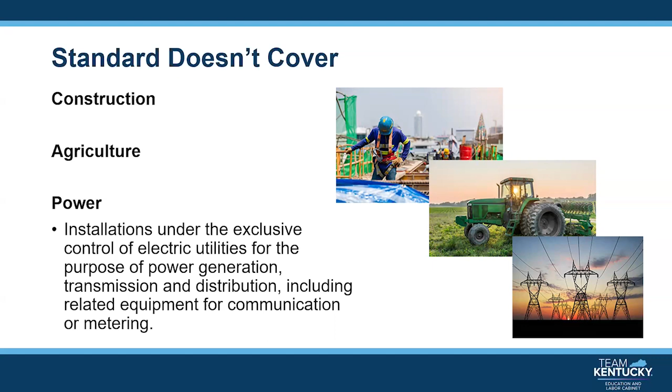It doesn't cover any work where the employee is exposed to just electrical hazards. Those activities would be covered under Subpart S of 1910, specifically Section 333. It also doesn't cover anything in oil and gas well drilling and servicing.

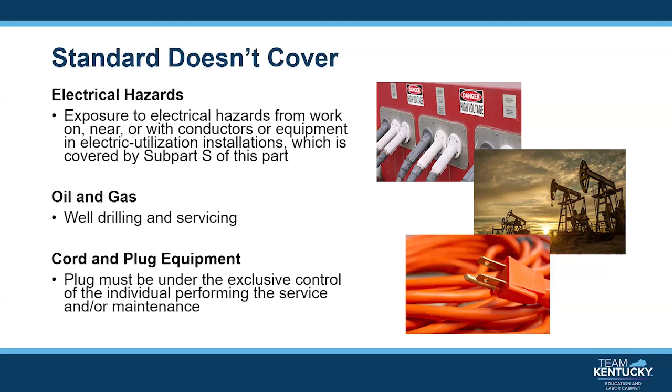And finally, it doesn't cover any cord or plug powered equipment, provided that unplugging the equipment completely de-energizes and isolates any hazardous energy pertaining to the equipment, and the plug remains under the exclusive control of the employee performing the servicing and or maintenance, meaning the employee has the authority to and is continuously in a position to prevent or exclude other individuals from re-energizing the machine or equipment during his servicing and or maintenance activity.

Lockout tagout is needed when employees are performing servicing or maintenance activities on machines and or equipment. OSHA defines servicing and or maintenance as workplace activities such as constructing, installing, setting up, adjusting, inspecting, modifying, and maintaining and or servicing machines or equipment.

These activities include lubrication, cleaning, or unjamming of machines or equipment, and making adjustments or tool changes where the employee or employees may be exposed to the unexpected energization or startup of the equipment, or release of hazardous energy.

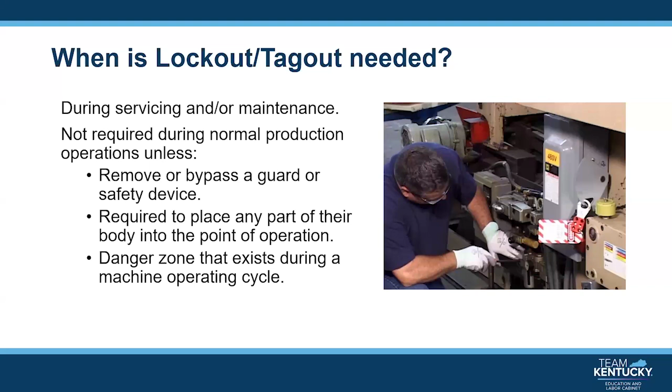Lockout tagout is typically not required during normal production operations unless an employee or employees is required to remove or bypass a guard or safety device, or required to place any part of their body into the point of operation, or enter a danger zone that exists during the machine operating cycle.

These are some examples of hazardous energies that employees could be exposed to. Over the next couple of slides, we'll show you some examples of those hazardous energies, as well as some of the sources they can come from.

So the first one is electrical. This can be powered via an electrical panel or a disconnect, which we'll talk about.

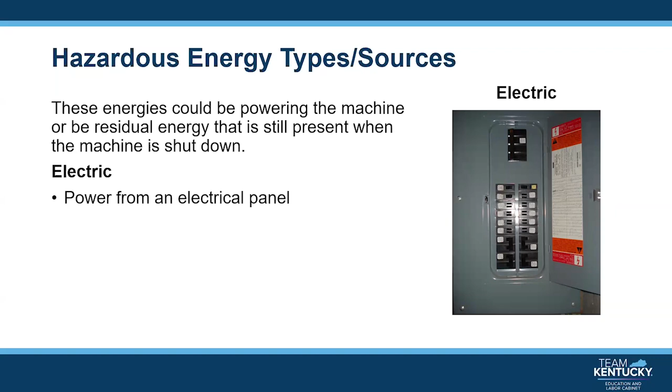You've got hydraulic hazardous energy, such as pressurized hydraulic fluid on a machine. You've got pneumatic or air, which could be from a pressurized airline on a machine.

You've got gravity. This is commonly associated with power presses or where you've got suspended parts on a machine that can come down and potentially crush the employee performing the service or maintenance activity.

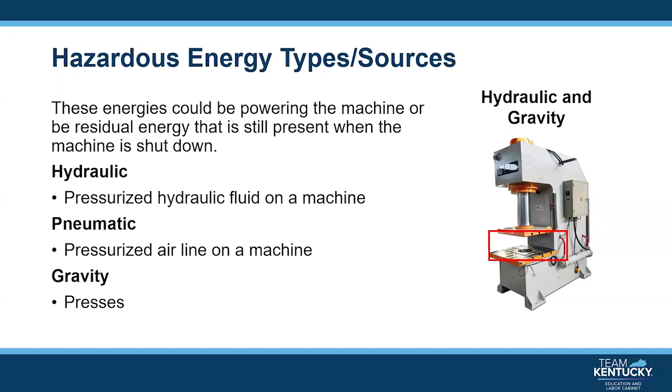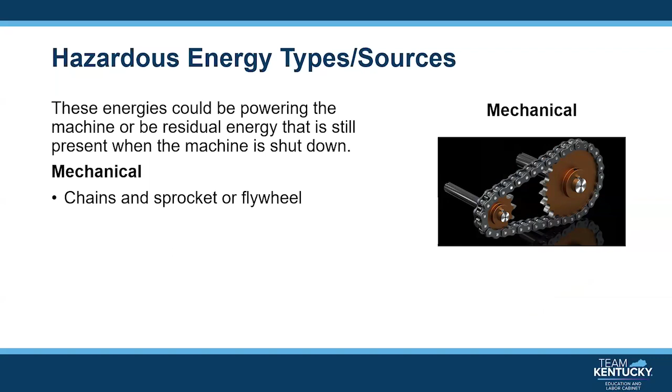You've got mechanical. This could be chains and sprockets, or flywheels, belts and pulleys on a machine.

You've got chemical hazardous energy. This could be from chemical vats or pipes with corrosives.

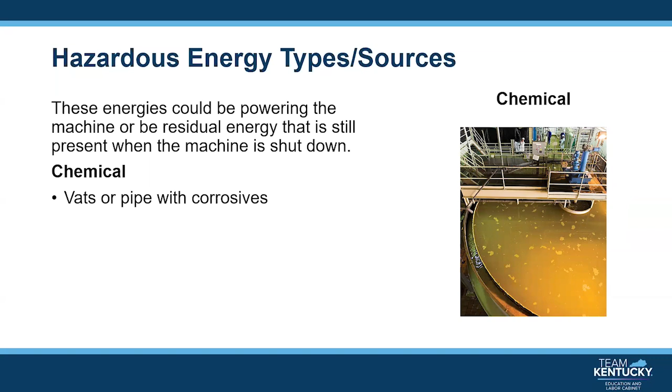You've got thermal hazardous energy. This is commonly associated with facilities that have ovens.

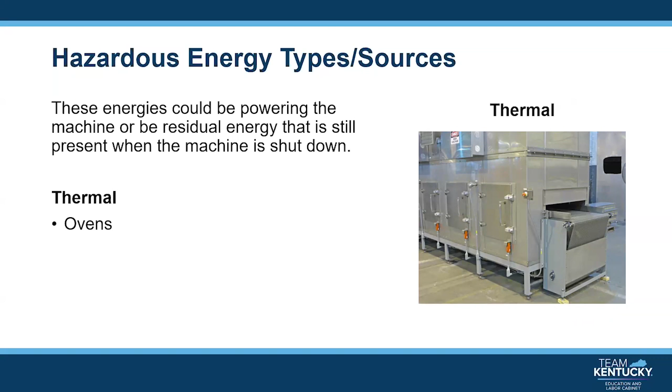Control circuit devices such as interlocks used in machine guarding are not considered energy isolating devices, as they do not isolate power.

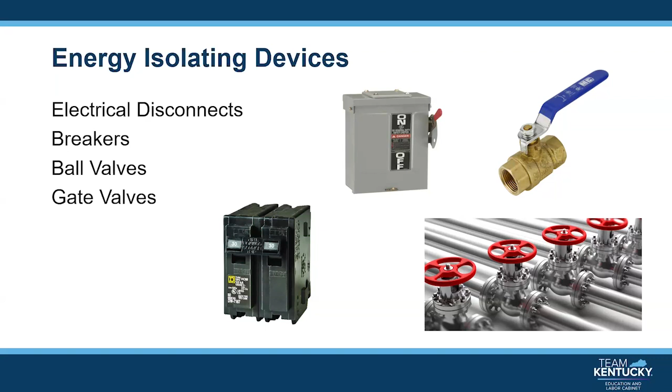Commonly referred to as being one and the same, lockout tagout is actually two different practices of isolating hazardous energy. Lockout is the practice of applying a lock to an energy isolating device. Tagout is applying an awareness device, such as a tag, to an energy isolating device.

1910.147 states that if an energy isolating device is capable of being locked out, the employer shall utilize lockout unless the employer can demonstrate that utilization of a tagout system will provide the same amount of protection. Additional means to be considered as part of demonstrating full employee protection regarding tagout include implementation of additional safety measures, such as removal of an isolating circuit element, blocking of a controlling switch, opening of an extra disconnecting device, or removal of a valve handle to reduce the likelihood of inadvertently energizing the machine.

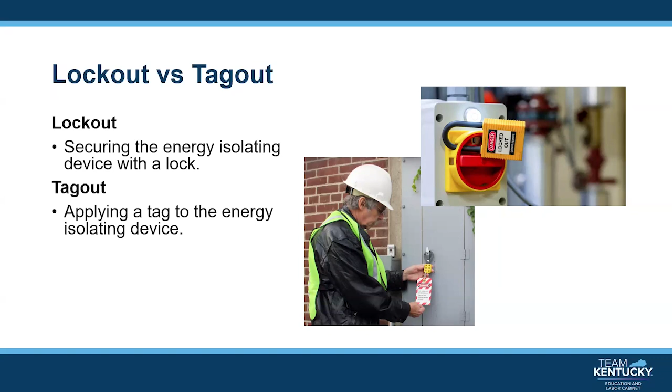Kentucky has a more protective requirement, 803 KAR 2309, that requires lockout if an energy isolating device is capable of being locked out. Pursuant to House Bill 398 of the 2025 regular session and subsequent amendment to Kentucky Revised Statute 338-62, effective June 27th, 2025, the requirement is not enforced in the private sector. The requirement remains applicable in the public sector. That being said, employees are better protected when a private sector employer adheres to 803 KAR 2309 and utilizes a lock.

Lockout devices and tagout devices shall indicate the identity of the employee applying the device or devices, need to be durable enough to withstand their environment, and need to be used only for the purpose of lockout or tagout. For example, you cannot use your locks for lockout on lockable interlocks. Another lock, perhaps a different color or style, would need to be introduced into your program.

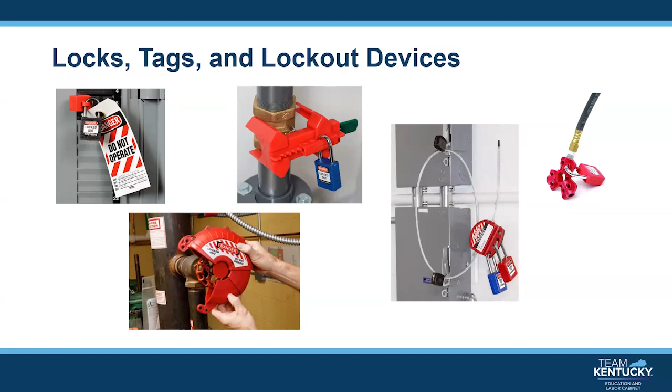Under 1910.147, an employer is required to establish an energy control program for the purposes of lockout tagout. OSHA requires that an energy control program shall include, at a minimum, energy control procedures for the machines that require them, that employers conduct periodic inspections on those procedures, and that training is provided to employees that fall under 1910.147. Next, we will be discussing these requirements, starting with energy control procedures.

1910.147 requires that an employer develop energy control procedures for machines and or equipment unless an 8-step exemption is met. That exemption being: the machine or equipment has no potential for stored or residual energy or reaccumulation of stored energy after shutdown, has a single energy source easily identified and isolated, and the isolation and locking of that energy source will achieve a lockout state. The machine or equipment is isolated during servicing or maintenance, and a single lockout device will achieve a lockout condition.

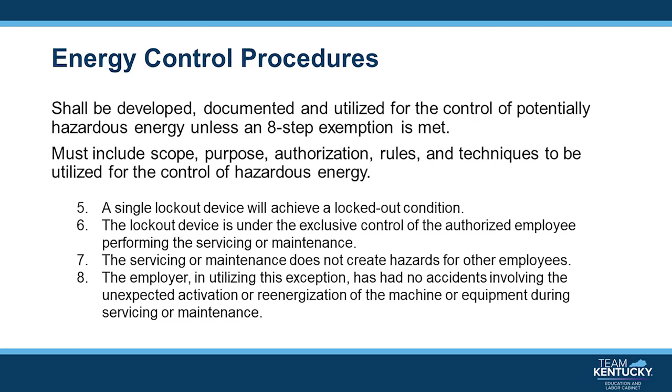As you can see here, here's the first part of it. So we'll transition. Again, it's a very good starting point. If you don't have an energy control procedure, you at least want to make sure you get the basic requirements. This is a good starting place.

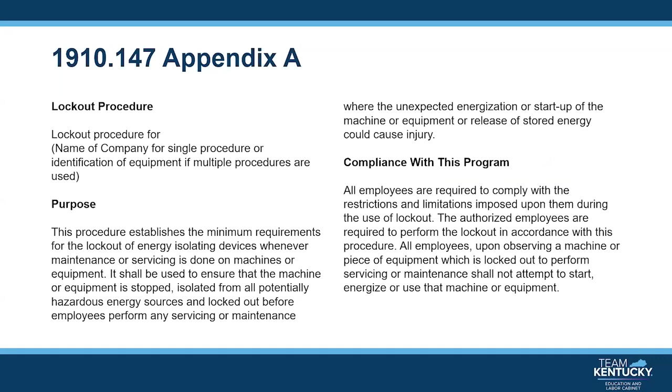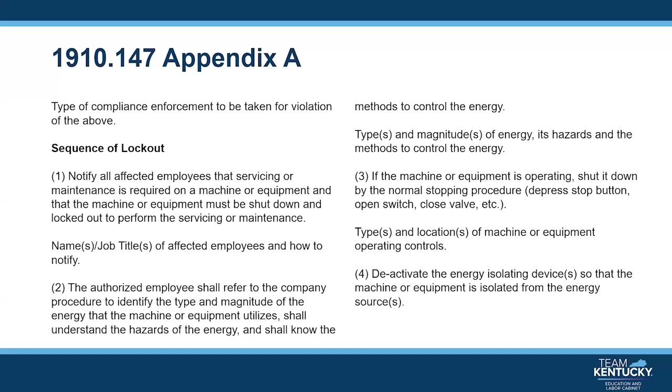The one thing I do want to mention is this is just an example procedure. There are some things that as an employer you will have to tailor to your own process. You can see some of those on this slide, such as naming the employees involved, and the types and magnitudes for the hazardous energy associated with the equipment. So again, you will have to tailor this to the machine. You can't just simply print this off, stick it on that machine or stick it in your program and be fully compliant.

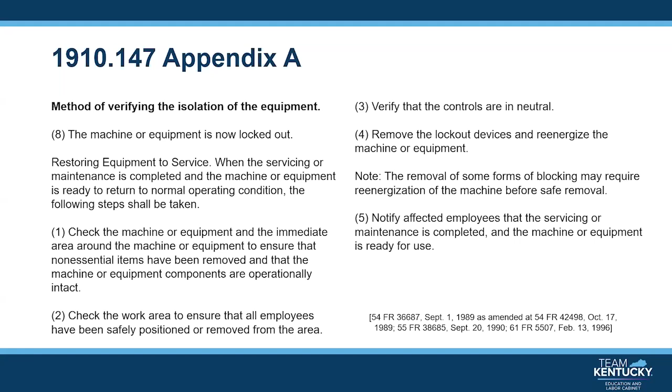Okay, so that's towards the end of the example procedure in Appendix A. Again, that can be found on OSHA's website in section 147. But moving along...

We'll be moving into periodic inspections. 1910-147 requires that inspections be performed on energy control procedures at least annually. The inspection needs to include at least the employee who performed the procedure and an employee that will act as the inspector. As the employee performs the procedure, the inspector will look for any inadequacies or deviations regarding the procedure. The inspection needs to be documented and identify the machine or equipment, the employee or employees performing the procedure, and the inspector.

According to OSHA's compliance directive for lockout tagout, OSHA recognizes that some employers choose to develop machine-specific energy control procedures for individual machines or pieces of equipment, because this approach provides the optimum level of detail, enhancing overall employee safety during servicing operations.

In order to not discourage this practice, employers who develop energy control procedures for individual machines may still group the same or similar individual machine or equipment procedures for periodic inspection purposes. The inspection results can be shared with authorized and affected employees not included in the inspection during group meetings.

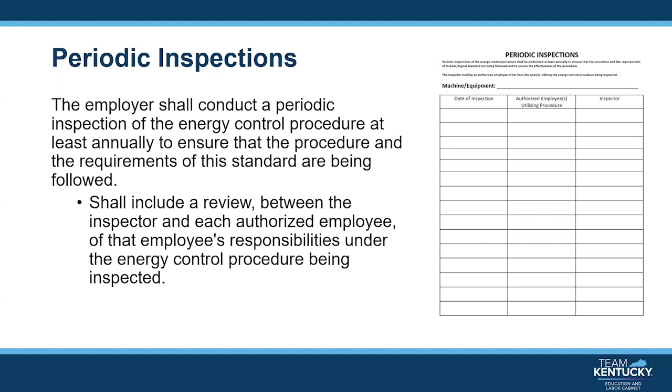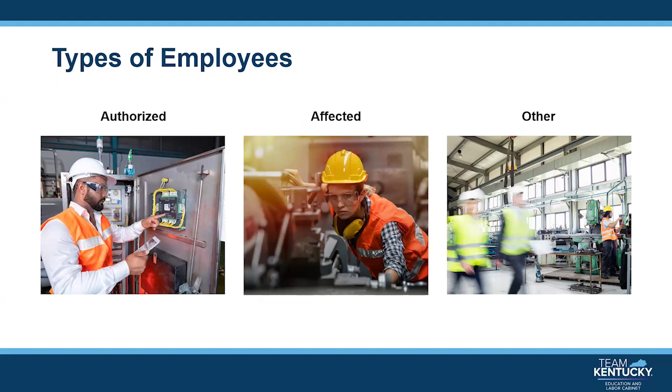In 1910-147, employees can be divided into three types: authorized, affected, and other. An authorized employee locks out or tags out machines or equipment in order to perform servicing or maintenance on that machine or equipment. This can be maintenance employees, operators, etc. Anyone that is required to perform servicing or maintenance and is required to lock out the machine or equipment.

These employees are required to be trained on the recognition of applicable energy sources, the types and magnitude of those sources in their workplace, and the methods and means to isolate and control these energy sources. In other words, they need to be trained on what lockout tagout is, what type of locks and lockout devices the employer has, and how to interpret the energy control procedure for machines or equipment they are assigned to, such as the hazardous energies pertaining to them and how to isolate them.

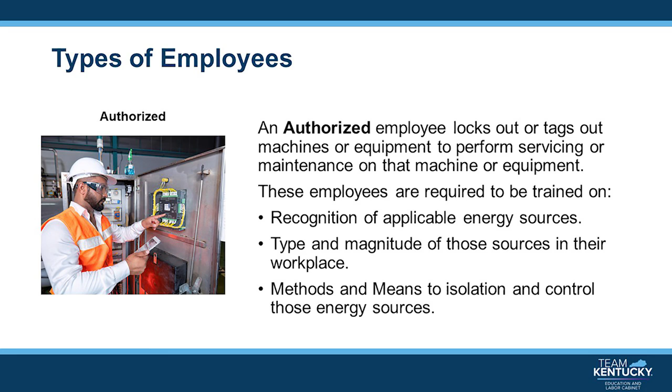An affected employee is one who operates the machines and/or equipment that lockout tagout is performed on, or is required to be in the area. This would most likely be an operator. They would need to be trained at least on the energy control procedure for their machine or equipment. If an affected employee is required to perform an activity that would require lockout tagout, then they would need to be trained as an authorized employee.

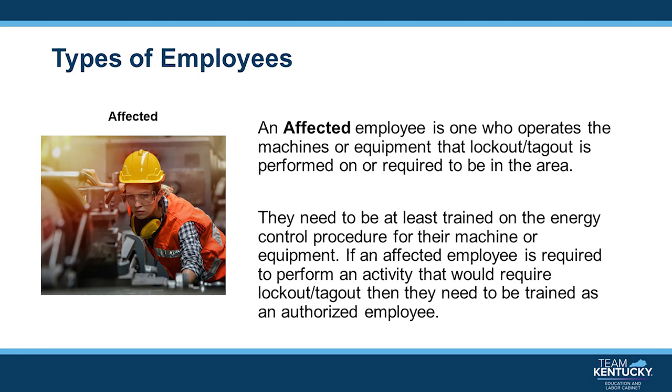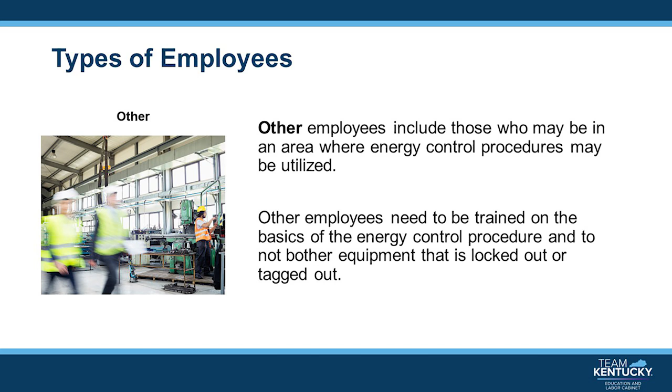Other employees include those who may be in an area where energy control procedures may be utilized. For example, these could be management, employees walking through the area, or material handlers. Other employees need to be trained on the basics of the energy control procedure and to not bother equipment that is locked out or tagged out.

In 1910-147, OSHA requires that the employer provide retraining when there is a change in the authorized and/or affected employee's job, or there's a change in the machines, or there's a change in the energy control procedures. OSHA also requires that both initial and retraining be documented and include the name of the employee or employees trained and the dates of training.

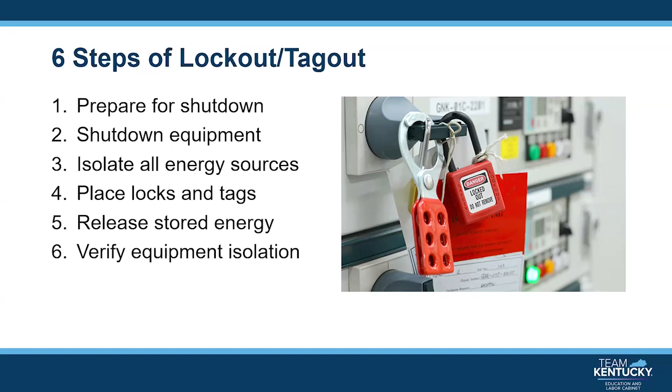The first is prepare for shutdown. In this step, authorized employees should have been trained in lockout tagout for the machine and or equipment that they are going to be performing servicing and or maintenance on. They need to ensure that the energy control procedure for the machine or equipment has been reviewed, gather locks, tags, and lockout devices required, and notify all affected employees.

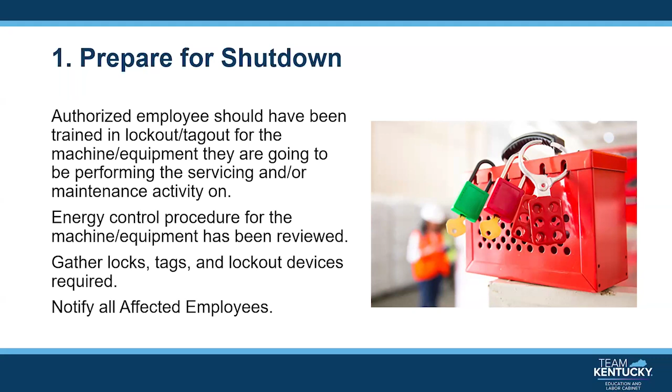In the next step, the authorized employee will shut down the machine or equipment using its normal shutdown procedure.

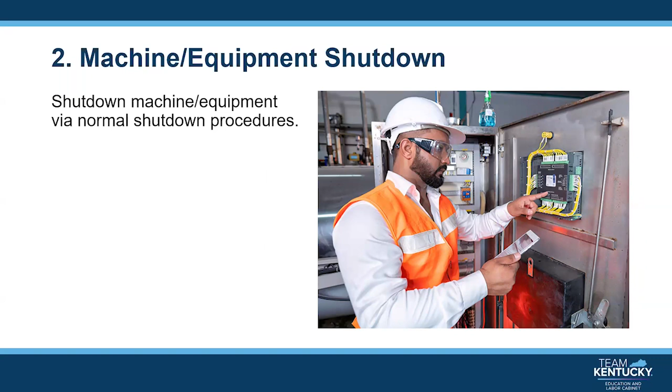After shutting the machine or equipment down, the authorized employee will identify the energy isolating devices associated with the machine and will use them to isolate the hazardous energies from the machine or equipment. Some examples include switching off electrical disconnects, turning air shutoffs, switching off breakers, and turning valves.

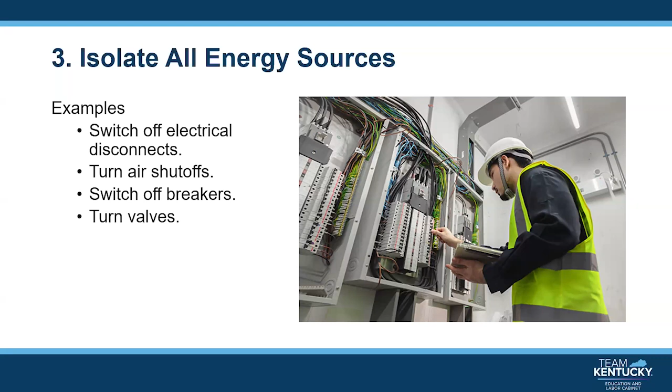After isolating the hazardous energies from the equipment, the authorized employee will apply their locks and or lockout devices to the energy isolating devices.

Next, the authorized employee will release and or block any stored or residual energy remaining in the machine or equipment. For example, this could be discharging capacitors, blocking or releasing springs, blocking elevated parts such as dies on a power press, stopping rotating flywheels, relieving system pressure, draining fluids, venting gases, or allowing a hot system to cool.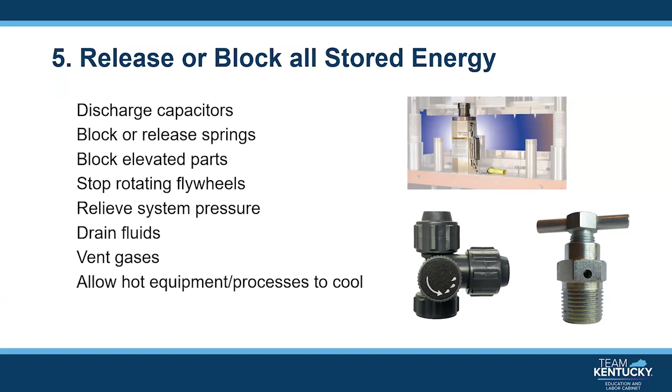The last step of lockout tagout is verifying that equipment has been isolated and hazardous energies for that equipment have been controlled. This is typically accomplished by checking and ensuring all employees are out of the area, checking that all lockout devices are securely in place, attempting normal startup, or visually verifying by looking at gauges, using testing equipment, etc.

After verification has been completed, the machine controls would be returned to the off or neutral position, and then the authorized employee may perform servicing and or maintenance.

OSHA allows the temporary removal of lockout tagout for the purposes of testing or positioning machine and equipment. An example of this would be during die setting operations.

When lockout tagout devices must be temporarily removed for testing and or positioning, the authorized employee must clear the machine of tools, remove employees from the hazardous areas in and around the machine, remove lockout and tagout devices. They can then re-energize and test.

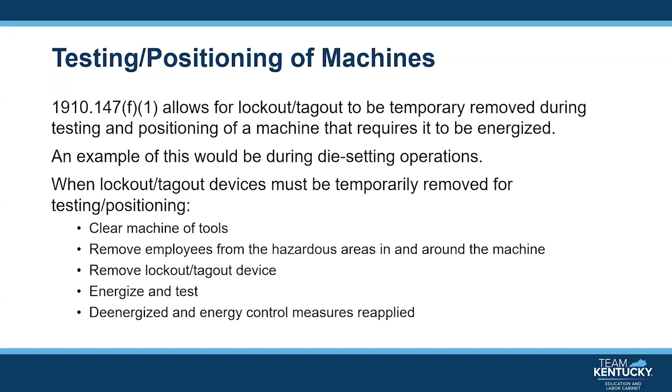If additional servicing and or maintenance is required, the machine or equipment must be de-energized and energy control procedures must be reapplied.

After servicing and or maintenance activity has been completed on the equipment, the authorized employee will release it from lockout tagout to normal production operations.

This process involves inspecting the work area and the machinery or equipment, ensuring all machine guards are in place, moving tools away from the equipment, informing others of startup. The authorized employee would then remove locks and tags and conduct normal startup operations.

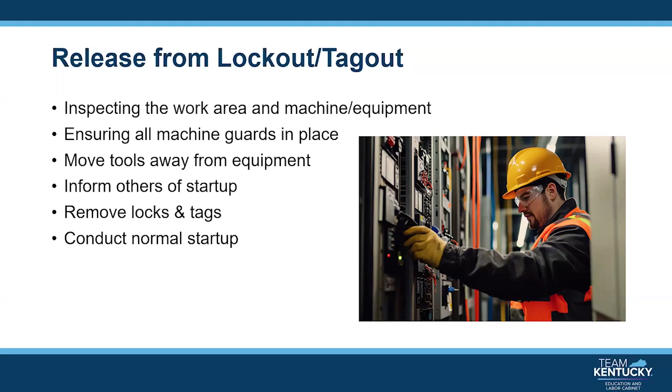There are times when servicing and or maintenance activities may require more than one authorized employee and therefore would require a group lockout tagout. In these cases, a primary authorized employee must be designated for the group.

The role of the primary authorized employee is to ensure that every employee that enters into the hazardous areas of the machine or equipment is out of those areas prior to lockout tagout being removed.

Typically, group lockout tagout is performed by one of the employees in the group having enough locks and or lockout devices for the machines or equipment. That employee will then perform the steps outlined in the energy control procedure for the machine or equipment.

During this process, the employee will place one of their locks on a group lockout device. The configuration of this device may vary on the amount of employees involved in the process.

After the initial employee performs the initial lockout tagout for the machine or equipment, each additional employee involved will perform the steps outlined in the energy control procedure for the machine or equipment. After performing those steps, additional employees will place their personal lock on the group lockout device.

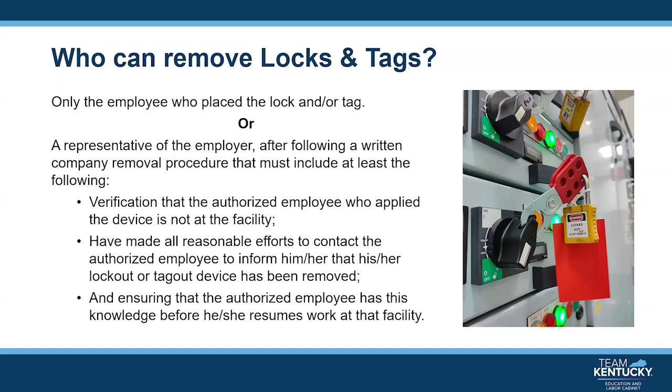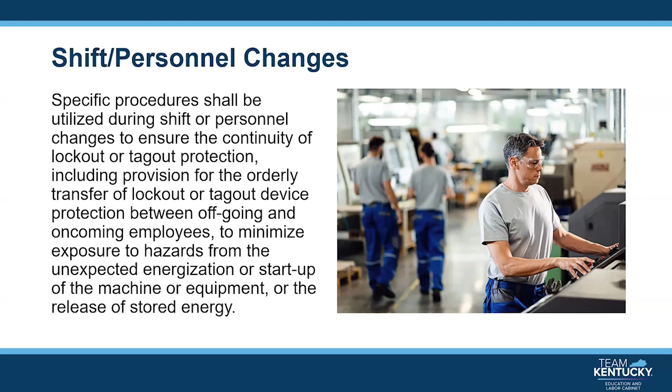OSHA requires specific procedures be utilized during shift or personnel changes to ensure the continuity of lockout or tagout protection, including provisions for the orderly transfer of lockout or tagout device protection between offgoing and oncoming employees, to minimize exposure to hazards from the unexpected energization or startup of the equipment or the release of stored energy.

All on-site or host employers and outside employers shall be communicating their lockout tagout procedures. As the on-site employer, you would be considered a controlling employer under OSHA's multi-employer worksite policy. The controlling employer is responsible for ensuring subcontractors on their worksite are following

1910-147. The performance-oriented nature of the standard permits the outside contractor employer to use either the host employer's energy control procedure, which some companies will require, its own procedures, or a combination of the two, provided the resulting procedure meets the requirements of the lockout tagout standard.

The contractor can also be part of a group lockout if the host employer prohibits outside personnel from performing the initial lockout. In this case, the contractor would apply their lock onto a group lockout device.

The last topic we will be discussing is vehicle hazardous energy. Vehicles such as automobiles and related equipment are covered under 1910-147 while employees are performing service and/or maintenance activities.

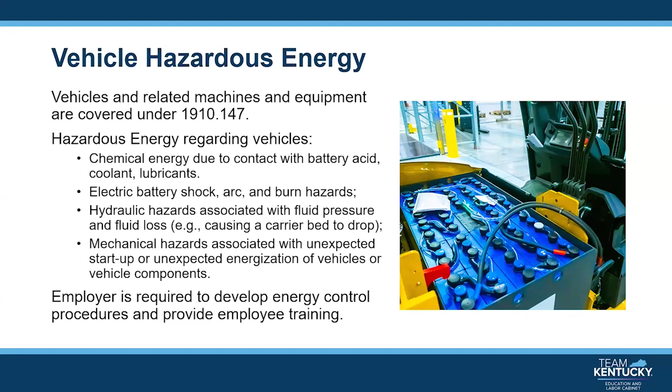This concludes the webinar pertaining to lockout tagout. A great resource that I used while I was a compliance officer, and currently as a consultant, is the compliance directive for lockout tagout. The directive was created to assist compliance officers in determining if an employer was compliant with 1910-147, but it has a lot of useful information and guidance that employers